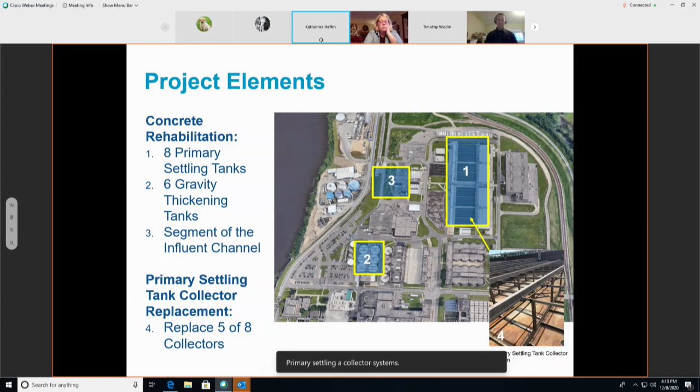This project will include concrete rehabilitation in 8 primary settling tanks, 6 gravity thickening tanks, and a segment of the north and south influent channel, and primary settling tank collector replacement. An emergency declaration was approved by the council July of 2020 as business item 2020-206 to replace 3 failed primary settling collector systems. This project will replace the remaining 5. Next slide, please.

This contract will construct solids storage pad improvements in areas 1 and 2. We will replace asphalt pads with concrete and improve drainage systems. In areas 3 and 4, we will rehabilitate roads and storm catch basins, install sidewalks, remove unused railroad tracks, and rehabilitate curbs. Next slide, please. Next slide, please.

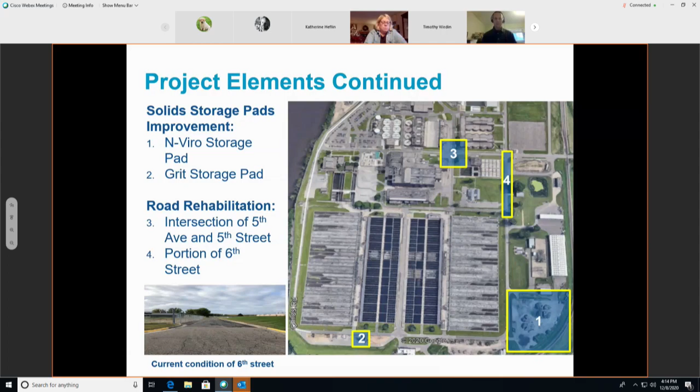This contract will install closed loop cooling systems for plant air compressors at 2 locations. The compressors supply air for pneumatic instrumentation and air-powered tools. The compressors currently use groundwater for once-through cooling. The closed loop cooling will reduce the use of groundwater at the plant, believe it or not, 33%. Next slide, please.

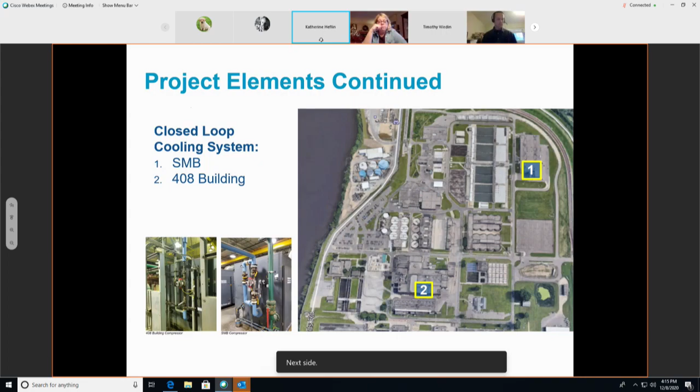Finally, miscellaneous work items included in this contract are inspection of the South St. Paul force main that runs inside the plant to ascertain its condition, replacement of a segment of the city water line that's near end of service life, head house improvements, and replacement of broken wall tile in the compressor building. Next slide, please.

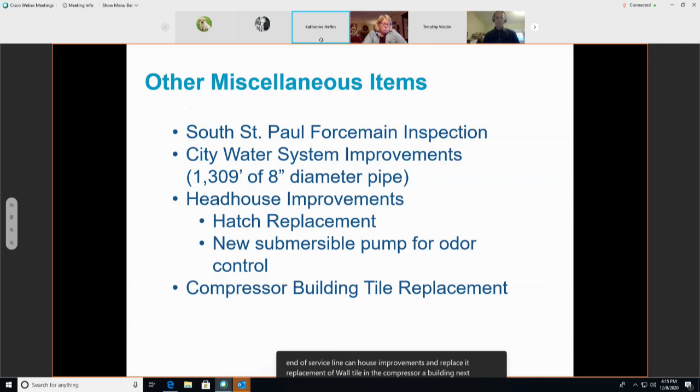The engineer's estimate for this work is $13,787,882. The project was advertised September 18th, 2020. 2 bids were received November 5th, 2020. One is from Shank Constructors, Inc. in the amount of $13,119,800.

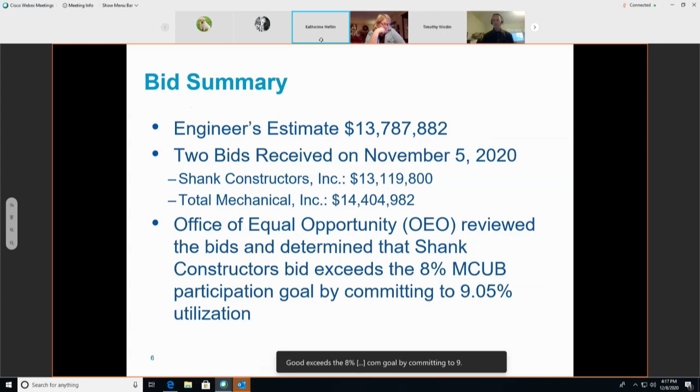And the second one is from Total Mechanical, Inc. in the amount of $14,404,982. Shank Constructors was determined to have the lowest responsible bid, and the Office of Equal Opportunity reviewed the bids and determined that Shank Constructors' bid exceeds the 8% MCUB goal by committing to 9.05% utilization. Next slide, please.

Therefore, it's the staff's recommendation that the Metropolitan Council authorize the regional administrator to award and execute a construction contract for the Metropolitan Wastewater Treatment Plant Rehabilitation and Facility Improvements Project, MCES project numbers 805990 and 808921, contract number 20P220 with Shank Constructors, Inc. for an amount not to exceed $13,119,800. Thank you, Mr. Chair and members of the Environment Committee.

Thank you. Any questions for Ms. Heflin? I'm wondering, is Shank a local firm or not? Mr. Chair, I believe so. Great. Other questions or comments on this? Or is there a motion? Councilmember Vento moves approval. Hudson here. I will second.

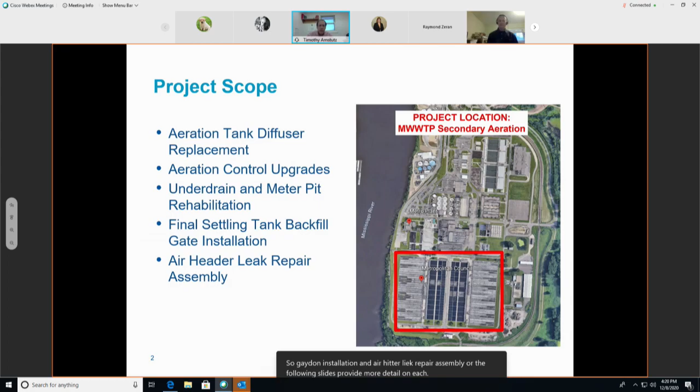Aeration tank diffuser replacement. This project will add about 340,000 individual membrane diffusers, which in the photograph are the circular discs shown attached to manifold piping. This project is the largest aeration diffuser replacement project in the country. The Metro plant currently has ceramic diffusers and will be switching to membrane diffusers.

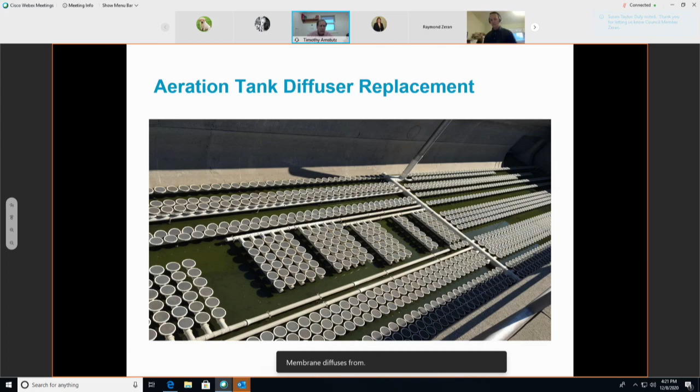Membrane diffusers do not need to be cleaned in the same manner as ceramic diffusers. This will save O&M time and cost. The estimated energy savings switching to membrane diffusers from ceramic is about $400,000 per year. Next slide, please.

Aeration control upgrades. The plant has 16 aeration tanks in which each aeration tank has 12 zones, as shown on the slide. This project will add aeration control valves in each of the 12 individual zones that currently don't have aeration control. This will allow for improved air control, process performance, and reduced energy usage. Next slide, please.

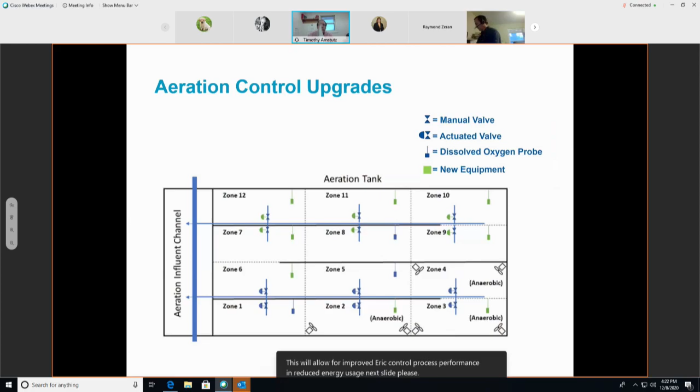There are 8 underdrain pits. The underdrains consist of a pipe valve gallery and a pump station used for relieving groundwater pressure below the aeration tanks. 1 underdrain pit serves 2 aeration tanks. Next slide, please. Next slide, please.

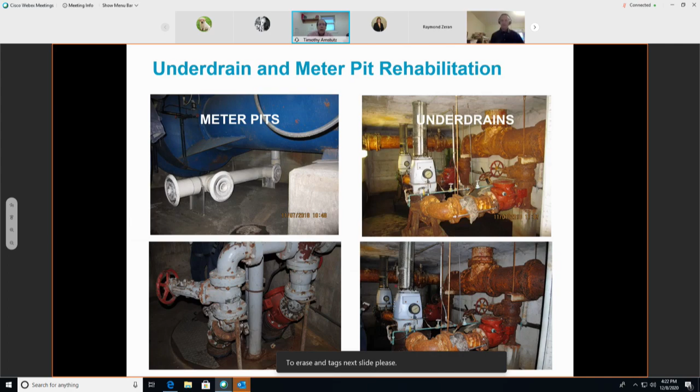Thank you. Final settling tank backfill gate installation. We are installing 24 backfill gate frames. The gates were identified as a need during our criticality analysis. If the existing sluice gates were to fail in place, half of the plant would need to be taken offline to replace the gates. This backup gate frame will allow for a temporary slide gate to be installed while the sluice gates are being replaced.

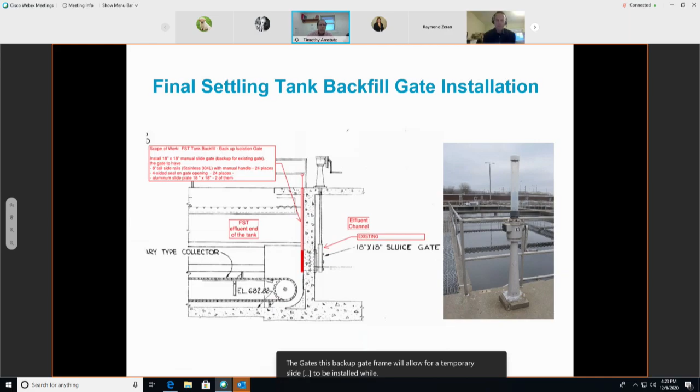Air header leak repair assembly. The existing aeration header is a 90-inch to 72-inch pipe providing air for our 16 aeration tanks, as shown on the left part of the slide. The line is constructed in sections, with each section being coupled through a split ring style dresser coupling. The couplings have been developing leaks in recent years, which decreases aeration efficiency and performance. The aeration line does not have isolation valves, which makes taking down the line to replace couplings extremely difficult.

This project will tighten the bolts on 17 of the worst leaking couplings. The project will also test an external fabricated ring retainer solution on 2 joints. If this is successful in reducing the leaks, more will be installed on a future project.

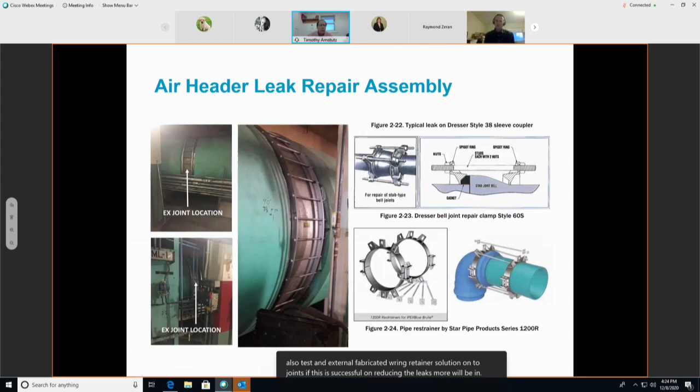Bid results. The invitation for bid for this project was advertised on October 1st, 2020. Procurement facilitated a public bid opening on November 3rd, 2020, and 1 bid was received. Shank Constructors Incorporated bid was in the amount of $32,388,600. The engineer's estimate was $50,774,703.

The project is financed by a loan from the Minnesota Public Facilities Authority and has a disadvantaged business participation goal of 2%. The Office of Equal Opportunity determined that the bid from Shank Constructors Incorporated meets the numerical goals for this contract. Shank Constructors Incorporated bid was responsive and responsible.

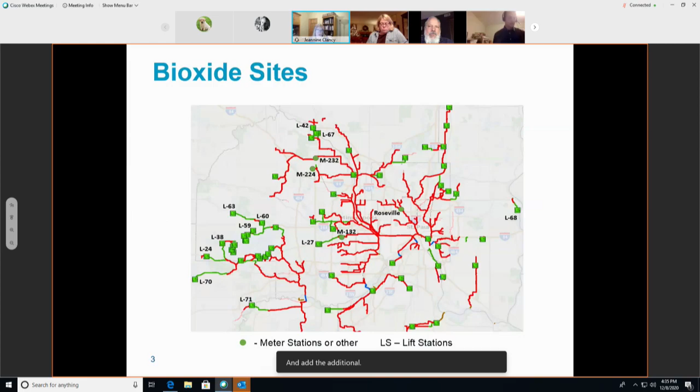And Evoqua monitors with Odalog equipment. And if you recall, when Jeff Schwartz and Lisa Wolfert were here, they showed you a picture of what Odalog equipment looks like. And then they also do sampling and testing field equipment at the dosing sites and at the additional 15 control points. Next slide, please.

So our proposed action this afternoon is that the Metropolitan Council authorizes the award, negotiation, and execution of a sole source contract with Evoqua Water Technologies for an additional 18 months and not to exceed $4.5 million to provide bulk chemicals and services for odor and corrosion control. And with that, Mr. Tracy and I will respond to any questions that you have. Thank you. Any questions?

Seeing none, let's have a motion. Or Councilmember Zirin, you're on mute. I'll make the motion. Motion has been made. Is there a second? I'll second it. All righty.

Roll call. Fredson, aye. Turner, aye. Vento, aye. Zirin. Yep, I saw him say aye. Aye. Thank you. Lindstrom. Aye. Thank you.